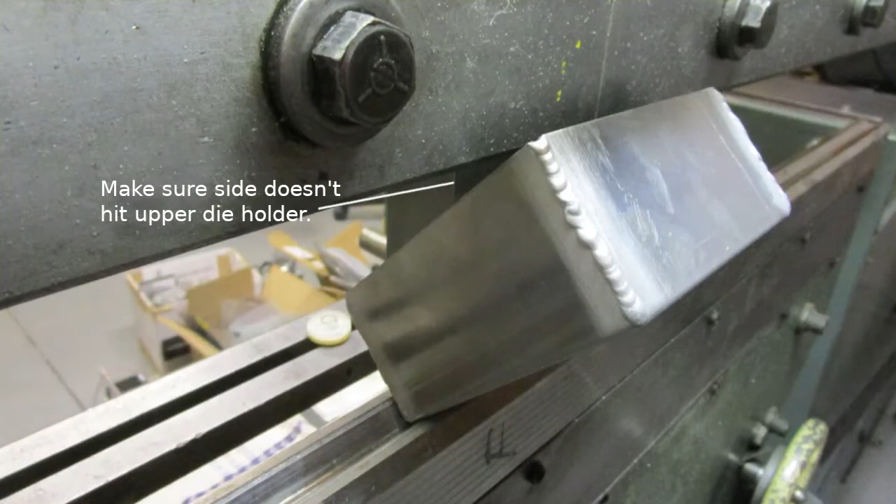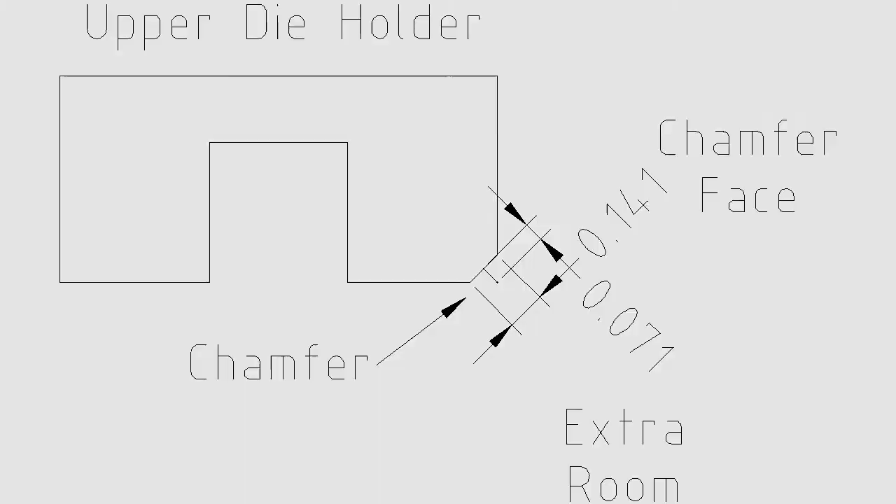The goal is to know in advance what depth is possible when bending up a box or pan with a straight die. If the side height is too large for your die, the bent metal will collide with the upper die holder and ruin the part.

The photo shows where metal could hit the die holder. This box was made and TIG welded in a previous project. It's shown here as an example of a typical box or pan bend situation.

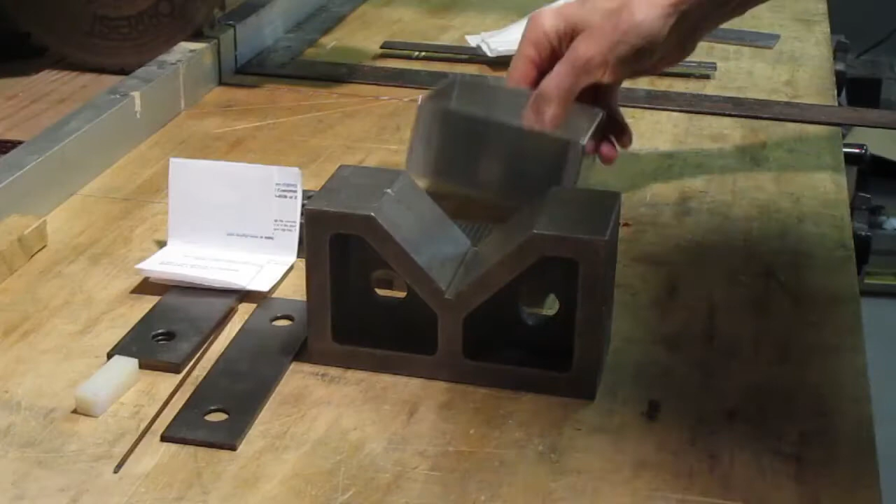In the previous video, we made a box or pan like this with an arbitrary 2-inch side, and there was a question raised as to how deep we can make this box with a straight die like this. So the situation you have here looks like this: your die comes down, bends the metal,

and your die holder is up here and projects a certain amount beyond the face of the die. So there's a possible collision point right in here. So the question we want to answer is, given this die, how deep of a box can we make to avoid a collision between this side and the die holder?

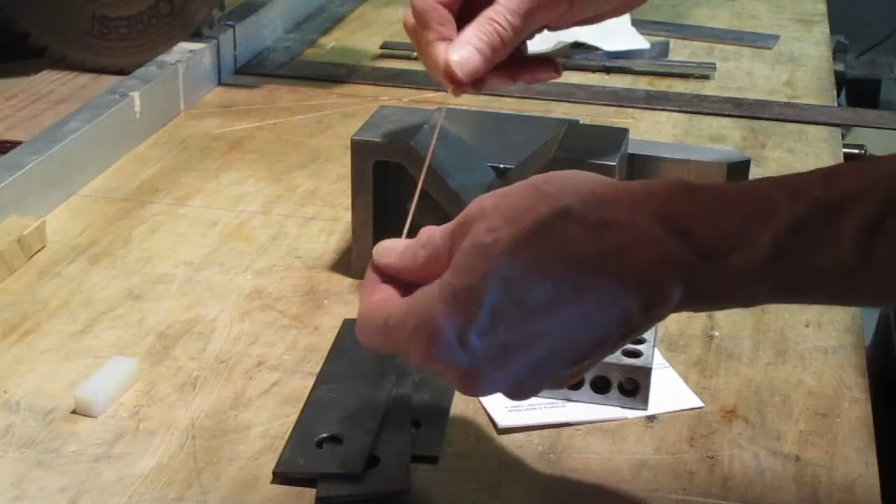If we use 2 pieces of paper as a shim, a 1-2-3 block, and then 3 precision parallels like this, a 90 thousandths welding rod, and a little spacer block, we can actually construct the geometry on the press brake, and verify that the theoretical calculation in fact shows up on the actual bending situation, just to check it out and make sure that the math is correct. So let's go over and do that.

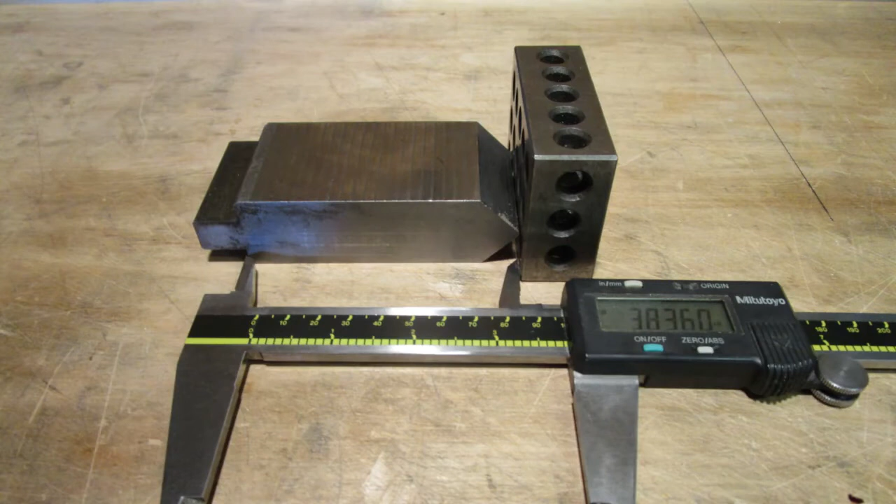We'll need some tooling and machine specific dimensions for the spreadsheet. These won't be precision measurements, but accurate enough to provide a meaningful clearance distance for a box and pan depth.

Measure the height of the die from its shoulder to the bottom of the bend center. There are lots of ways to do this, and one simple method is shown. Feel free to be creative with the tools and parts you have on hand.

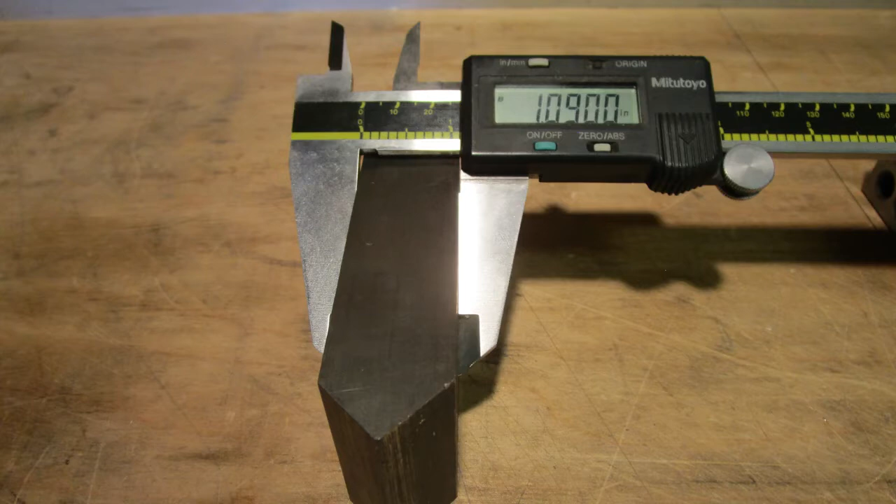The die width is also required. Note that the bend center might not be exactly in the middle. In this example, my die is off by 15 thousandths, which I accounted for to help with accuracy.

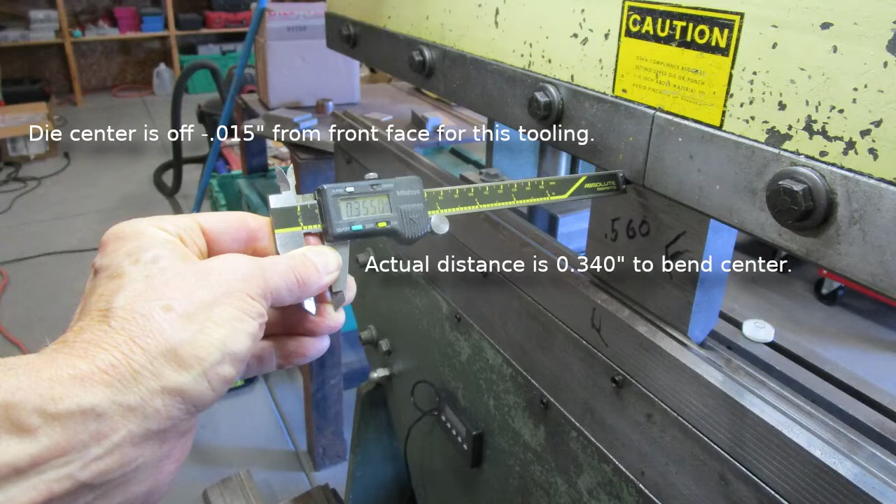The projection of the upper die holder beyond the bend center is important because it influences the available metal clearance.

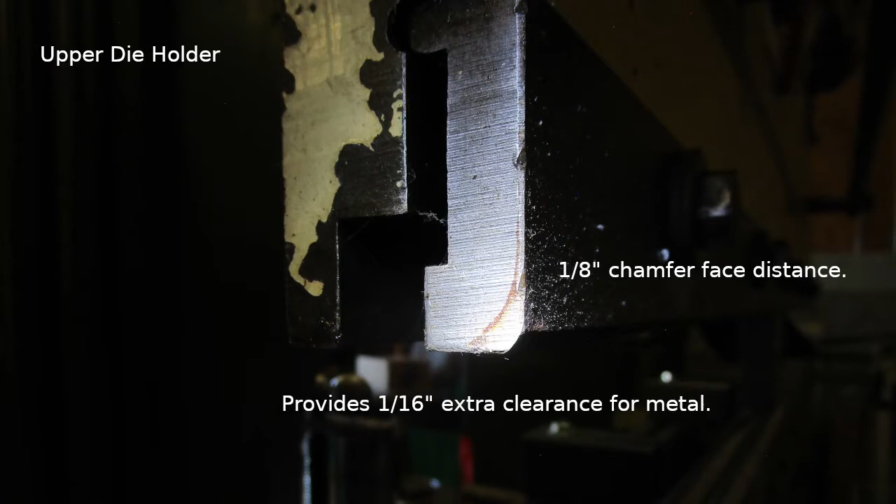The die holder might be chamfered, which provides additional space. That space increase will be half the chamfer face distance. It's simply half the diagonal of the square box drawn around the chamfer sides. In this case, it provides an extra 1/16 inch of clearance.

I went ahead and plugged these 4 numbers into the spreadsheet, which are shown in the green cells. The spreadsheet computed the available metal clearance at 2.149 inches. So let's call that 2.150 inches for an easier number.

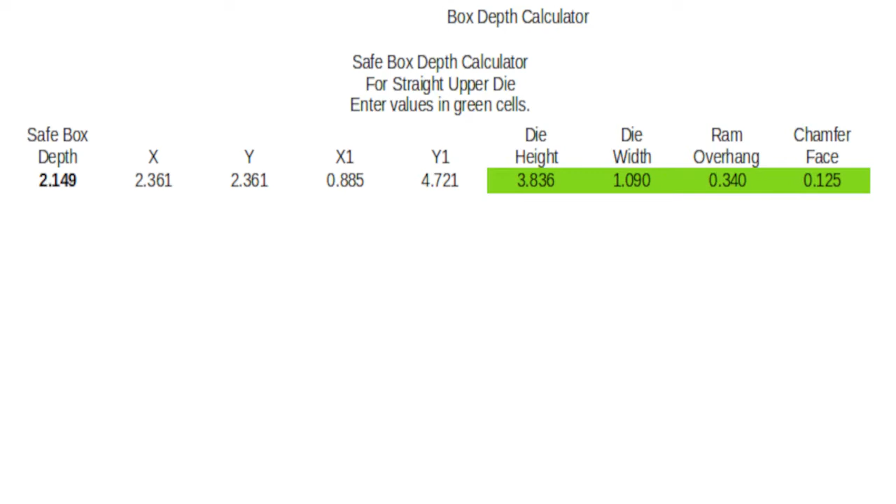Next is to do a mechanical construction of the geometry on the press brake to see if there is agreement between the theory and practice.

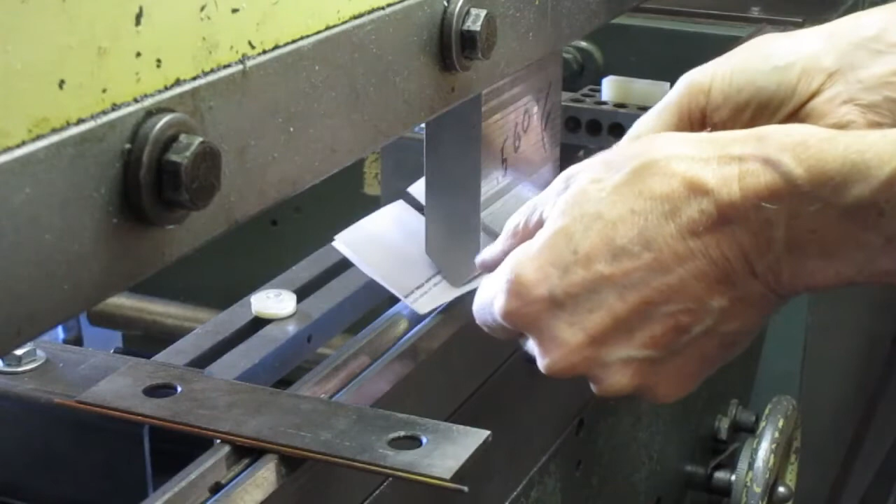Okay, we got all our goodies here. First thing, we'll put some paper shims underneath this die to give a little bit of pliability. Here's our welding rod, put that in there. That handles the radius in the lower die and prevents these sharp corners from misregistering against this radius.

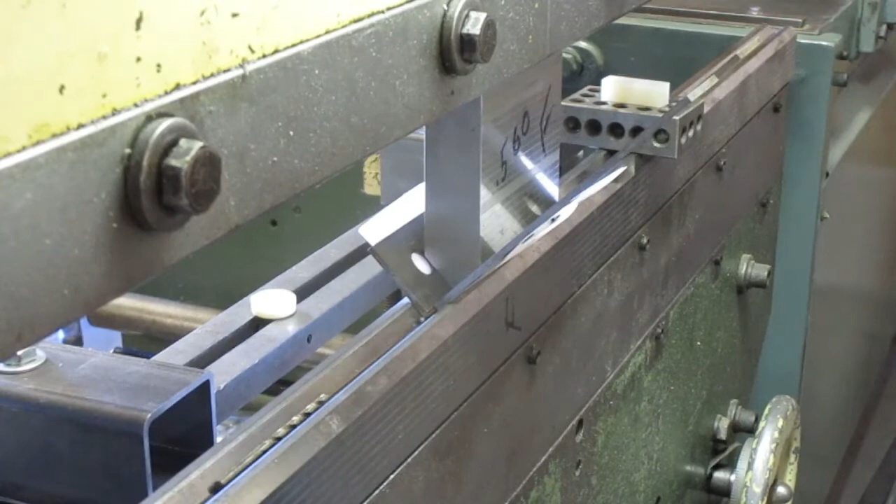So we'll bring in a precision parallel across the back. We'll set that right up against the rod. We have these two precision parallels, we'll put one on the right, one on the left. We'll let this overhang a little bit so we have an edge to support the 1, 2, 3 block. Go ahead and crank this down and put a little bit of pressure on it.

So now the face of this precision parallel is projecting off the face of the die. I'm looking in there, it's registering pretty well. I can feel just a little bit of slop in there, tiny little bit, so I don't know whether the angle on the lower die is a little different than what's on the upper die. We don't know, but it's pretty close. So we'll put in a little spacer block, and then we'll put in the 1, 2, 3 block here.

So what we're looking for is, according to the spreadsheet, 2.150 inches. That's what we theoretically calculated from the bottom of your pan to where it would hit this die holder. So I've got a chamfer on this, which is a 1/8 inch face. There's a parameter in the spreadsheet to deal with this, but it's very simple: if this is a 1/8 inch face, then what you get is an extra half of that, or 1/16 of an inch. So if this is properly calculated, we're looking for 2.150.